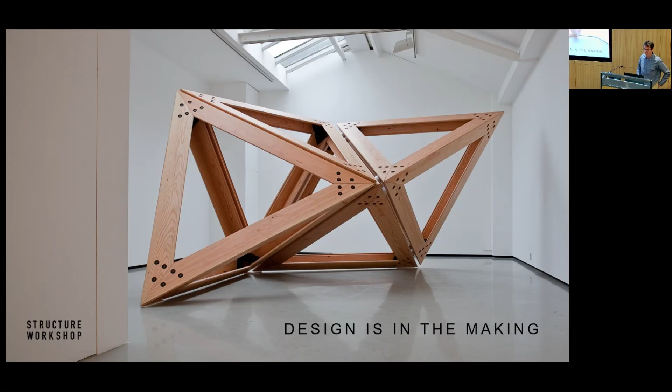Starting with a little bit of context, if you don't know my background, the first project I ever worked on after graduation was Crossrail, now known as the Elizabeth Line. I was conducting settlement studies above the running tunnels down Oxford Street, and that opened 30 years later. It gives you some understanding of how amazing that project is, the amount of combined effort, the amount of people that must have been involved, and how long a project of that sophistication takes, the gestation period. It's an incredible project, and it won the Stirling Prize last year.

However, whilst tunnel design was fascinating and I really enjoyed it, it's difficult to imagine a discipline perhaps with less potential for self-expression.

So after qualifying, I took some time out to work in a small bronze foundry in West London. Still noisy and dirty, but much smaller scale and much less regulated. And I really enjoyed that too - the satisfaction and interaction of physical work, as well as the cultural side of casting art.

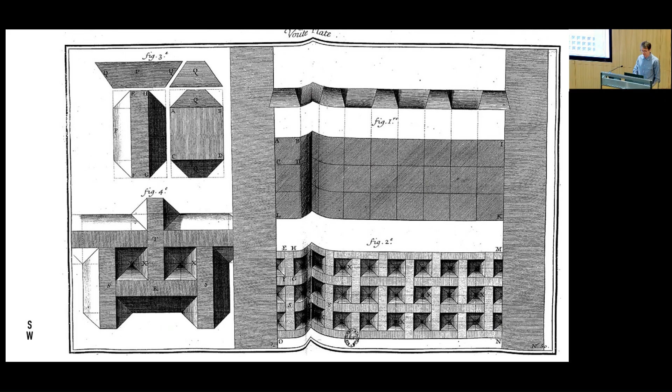Over the past couple of months, I've been working on a project with Jamie Fobert and his team, a proposal, during which they tabled this drawing by the French hydraulic engineer Joseph Abeille, describing his patent for a voûte plate, or a flat vault. This was drawn in 1699, from an age where etching and reproduction were costly, so it's concise and considered. It's both technical and full of imagination, beguiling even.

A great excuse to make a model, and a great excuse to spend Saturday with an old friend in his workshop in South London, talking about some fella from the 17th century and manifesting his idea into the physical. So together we milled up an old tabletop, made a jig, and cut a series of polyhedral modules.

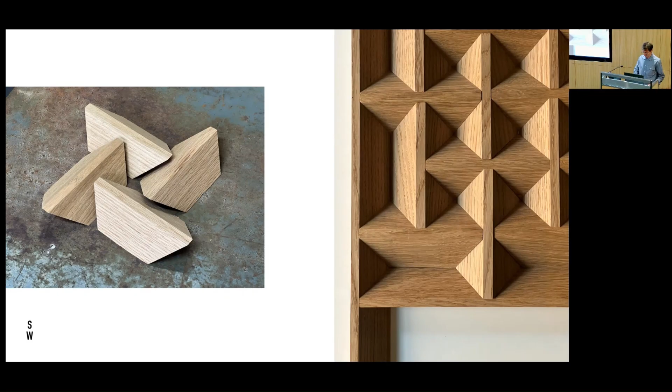And immediately our understanding improves. We gain a better appreciation of the parts, the way in which they tessellate, and their combined ability to connect without fasteners or glue. It also looked just like the drawing, which was encouraging. And it works, it spans. But what's interesting is that in making the model, it reveals characteristics that aren't immediately discernible from the drawing - the modules are really sensitive to rotating out of plane, and consequently the system is prone to collapse.

Perhaps it would be improved with a shoulder that locks each piece in place, but that would make it harder to make. And how would you make a jig to do that? Would a mason be able to do that? The design process is enlivened by making the model.

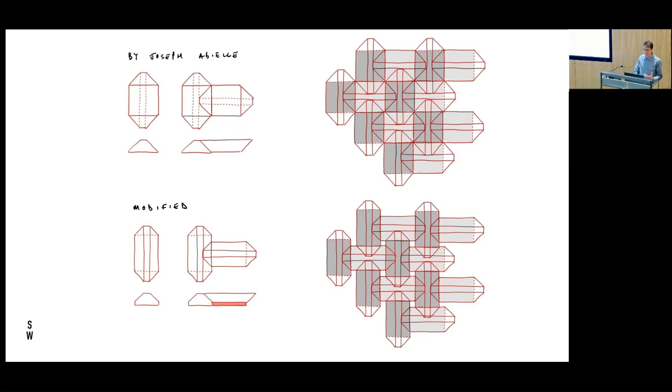Reciprocity is something we'd already been looking at with Carmody Groark Architects. This is the recently completed Art Play Pavilion at Dulwich Picture Gallery. This reciprocal arrangement of beams is similar. Each beam supports two beams at mid-span and is supported by two others at each end, and together the beams form a sort of two-way spanning mesh. But here the supports are simple. They actively allow rotation, unlike Abeille's voûte plate, which relies on horizontal restraint.

Carmody Groark wanted to use a UK-grown solid timber, Douglas fir, and the advantage of the reciprocal frame is that it only requires short lengths, which we felt provided more opportunity to secure high-quality, defect-free timber.

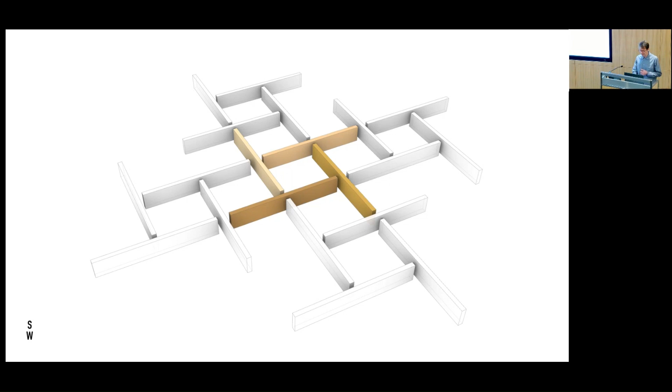Should assemblies start from the corner or from the centre? Turns out it doesn't really matter. How significant was cumulative slip in the connections? Pretty significant. And how might tolerances impact on the overall geometry around the perimeter? It's hard to say, actually.

But of course, engineering is more about materials than mathematics, particularly when designing in a natural material like timber. We wanted to check that our expectations of the timber could be met.

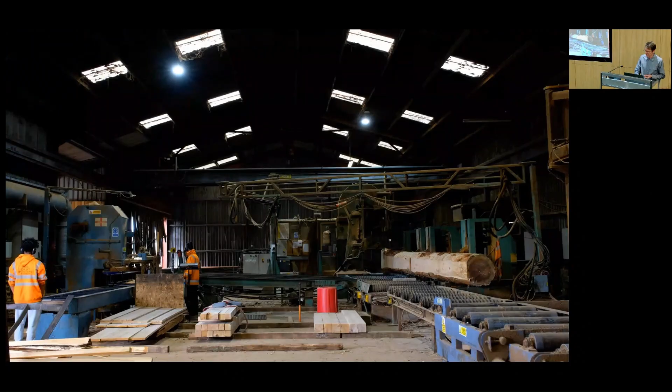So we turned to the expertise of a timber yard in Wiltshire called East Brothers. The subsequent discussions ensured that the pragmatic sourcing, cutting, drying, milling, and grading of the timber was rolled into the design, ultimately resulting in a high-quality supply that met expectations.

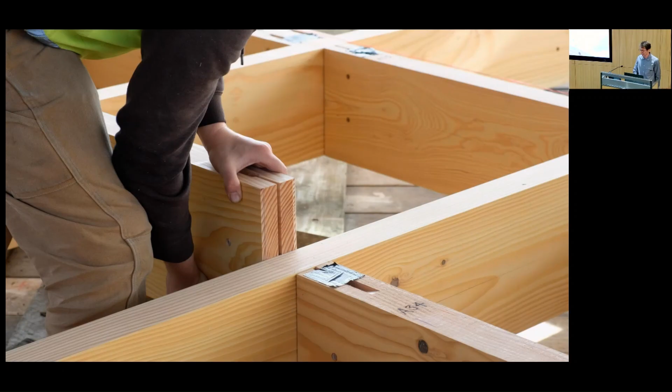And that process continued subsequently with the framer Timber Workshop, who added their practical knowledge to the mix, feeding into the design process, how to control moisture content during fabrication and installation, the practicality of our connection detail and how this might be improved, and allowed us to communicate our thoughts on sequence and tolerance. And the result is an exceptionally crafted building built from high-quality local material.

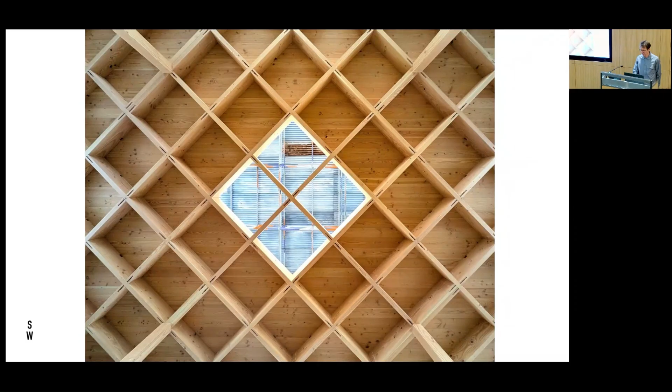Whilst we have complete control over our drawings, our influence over materials and workmanship is more limited, and that's why proximity to making matters. So I'm going to show a series of projects that I've worked on, all where craft and material exploration have informed the process, and hopefully demonstrate how this approach leads to solutions that are both technically resolved and rich in character.

The first is the Fenland Black Oak table, the closest we're going to get to a bridge this evening. The table is made from bog oak, the nation's rarest and most precious native hardwood. It's the magnum opus of master craftsman Hamish Lowe. For the past 30 years, Hamish has befriended the Fenland farmers, and now and then, when a farmer hits a piece of bog oak with the plough, rather than drag it to the side and burn it, they call Hamish.

So this story begins 5,000 years ago, when an ancient forest of massive oak trees once stood deep within the Fenland Basin of East Anglia, much, much taller than the oaks we have today. Over time, and due to a rise in sea levels following the last ice age, these spectacular trees fell into the silt of the flooded forest floor, and there they have laid, preserved in the peat in anaerobic conditions for 5 millennia.

In 2012, on a farm in the Wissington Fens of southwest Norfolk, a 13.5-metre section of one of the greatest of these buried giants was unearthed, from a tree so tall that the taper was indiscernible. Thankfully, the unique nature of the timber was recognised and the tree was retained whole.

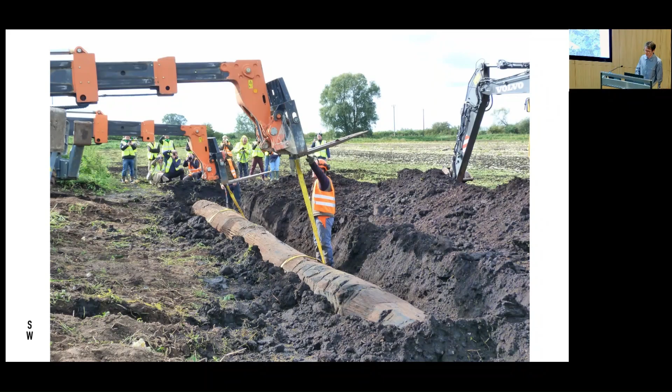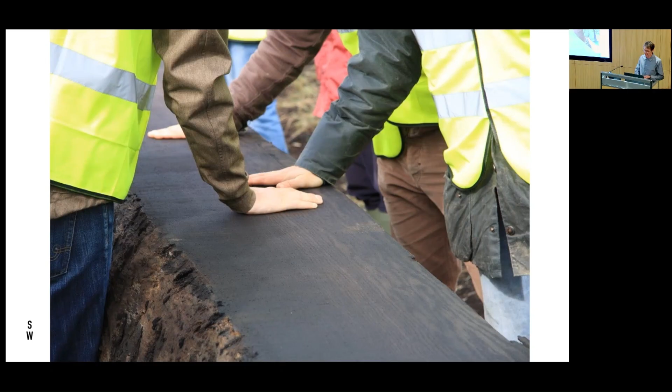Planked in situ, the quality of the timber was revealed for the first time, and it's completely mind-blowing. Perfect timber from the Bronze Age, carbon dated to 3300 BC. That's 1,000 years before the bluestones of Stonehenge. 10 magnificent, breathtakingly beautiful consecutive planks, unlike anything seen before.

Black oak needs to be dried artificially and very slowly. So over a period of 9 months, 1,800 litres of water were extracted from the planks in a purpose-built dehumidifying kiln. The planks shrank to almost half their thickness and a quarter of their width, and even 150 millimetres in length.

And I like this picture. It says something about the shared endeavour. And our protagonist, Hamish, is in the orange.

The planks were retained full length, and many new techniques were developed at the Building Crafts College to work on their unprecedented size. Here, the unique river joint is being set out, carefully cutting and matching the full length planks to one another to ensure it maximised the use of the existing timber.

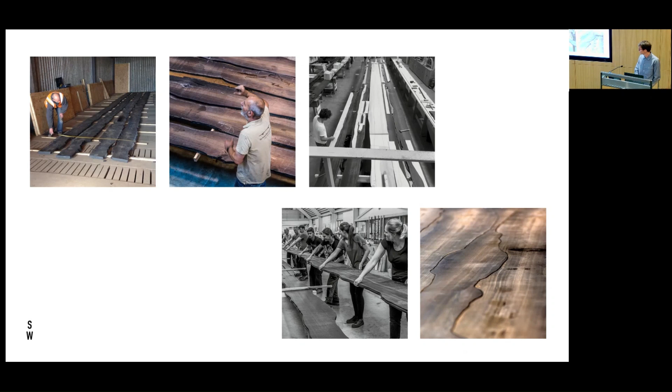The craftsmanship was exceptional. It was a simple decision to select bronze as the material for the base, and we developed a series of concept designs for analysis. The table obviously needs to be strong and stable, but if it was too stiff, it wouldn't conform to the uneven floors that we predicted for it.

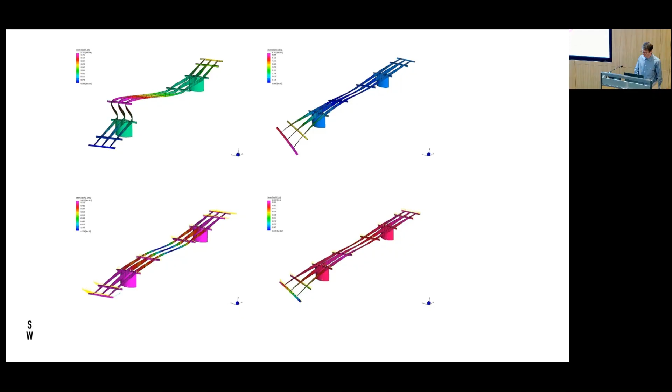Not stiff enough, and the cantilevering ends would bounce or rotate, making it unsuitable for a drink or a plate of food. It had to be just right, because there's no putting a beer mat under this table, I can tell you.

It also had to allow the timber to expand and contract according to its moisture content, and the table is huge and weighs more than a ton, but it needed to be moved by hand, and it needed to be split in two to allow for transportation. Plus, it had to avoid damaging a cathedral floor.

Ely Cathedral had agreed to display the table for 18 months, but we had strict limits on the point loads. And finally, it needed drop leaves. We'd been asked to design a mechanism that allowed 3 people to collapse the sides.

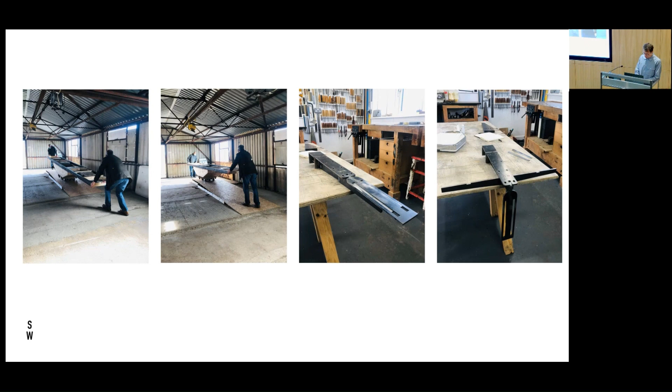So cue prototypes and exercise, rolling bits up ramps and developing leaf mechanisms. Ultimately, we selected a vertebrae type design, foldable ribs cantilevering from a torsionally stiff spine. This photo is at Benson Sedgwick's in Dagenham.

We could predict the behaviour of the bronze very accurately, but there's no substitute for having a bounce. You can see Joe testing the cantilever on the left from Structural Workshop.

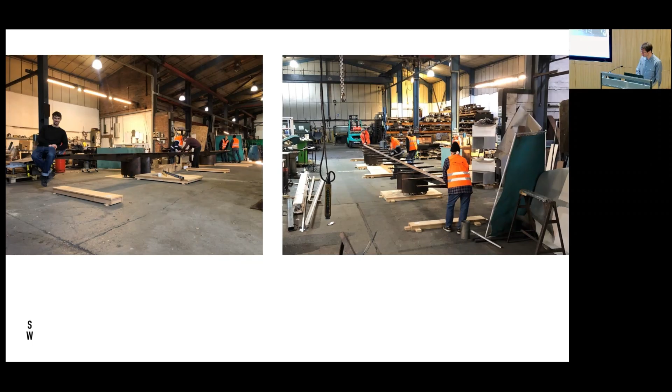This provides a sense of the scale of the table and how easy it is to move. And of course, those long drop leaves.

The table is currently at Lichfield on a slow tour around the cathedrals of England, and it's the most astonishing piece of timber that you can imagine, something I think is of international significance. But it also carries a stark reminder, not only of the depleted scale of our native trees, but of the real threat that climate change presents.

The flooding of the low-lying forests led to the total loss of something that was probably thought to be indestructible by the people of the time.

So from cabinet making to carpentry, sticking with timber though. This is Homerton College Dining Hall in Cambridge, designed with Feilden Fowles, who were appointed as architects following an international design competition. Alongside kitchen, servery and buttery, the project called for an emblematic centrepiece, an architectural composition to reflect the ambitions of the college and to relate to the rich and diverse mix of buildings around it.

The unlikely roots of the design, however, lie in a series of modest temporary structures on a brownfield site in Waterloo, the first of which was Feilden Fowles' own studio. It's probably as straightforward a structure as you can imagine, a post and beam frame that a first-year university student could design. But despite that simplicity, it demonstrates many of the characteristics of structural design that I'm interested in.

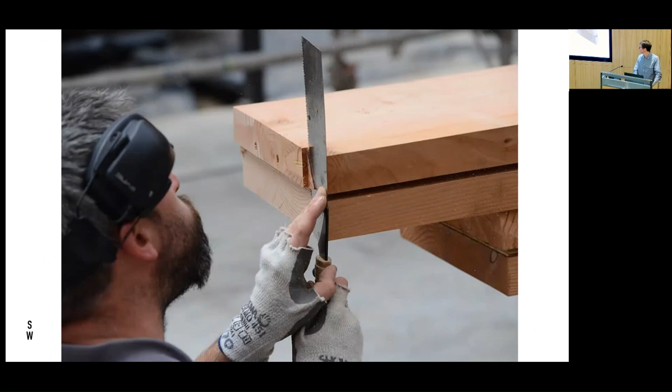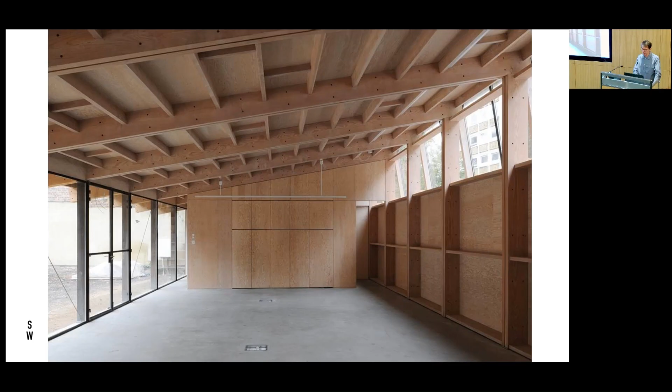A legible structure, very lean and simple here, expressed material used with skill, and a set of carefully considered details or connections. And then ideally, these aspects combine to articulate something about the ideas behind the building.

And for me here, it's simply the size of a piece of plywood. The lateral stability of the structure relies on a roof diaphragm to transmit wind loads to shear walls at each end. As such, the continuity of the plywood sheathing is necessary.

The door sets that you can see on the left are 1.8 metres wide, which provides the grid for glazing and primary beams. But anyone that has made something from plywood will know that it comes in sheets that are 2.4 metres long. So cutting these down to suit the beam spacing would waste 25% of the plywood.

So by ripping the sheets in half to suit the purlin spacing and by staggering the sheets, an effective diaphragm is formed that results in no waste.

The only thing you need are a set of noggins where the sheets are butt and where they must miss a beam. The depth of the beams, purlins and noggins halve sequentially, and the noggins march across the roof in thirds. It's an asymmetric arrangement based on an efficiency of material.

It's evident, but only if you care to observe it. But even if you don't, I think it subtly contributes to the liveliness of the building.

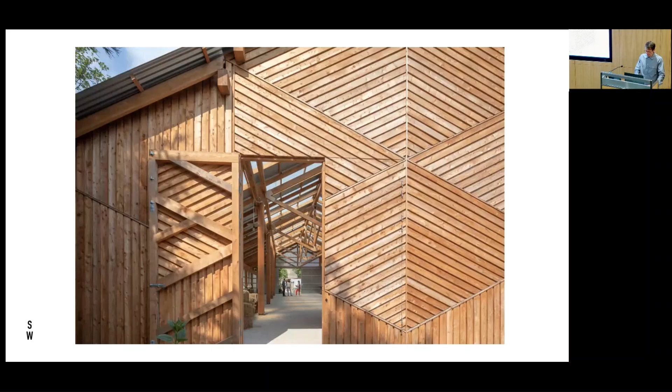The next building is a barn that bookends the same site. This is one of my favourite projects of all the structure workshop projects, despite its simplicity. Again, the structure is expressed and legible.

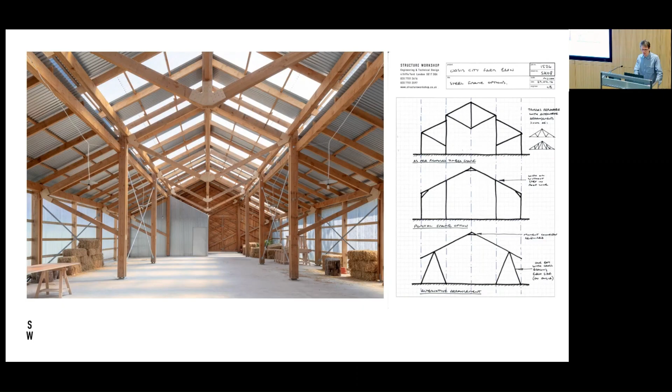Here, it's a little bit more playful. Distorting the central tied truss into a diamond has provided the building with some identity. And again, the articulation of the connections contributes to the quality of the building.

The design is intended to make the structure as simple to build as possible, and the connections use plywood gusset plates, carefully set out, enabling them to be CNC cut on a router. The framing members then have single straight cuts each end and are simply zipped together with screws. And with no steel flitch plates, the frame is extremely low in embodied carbon.

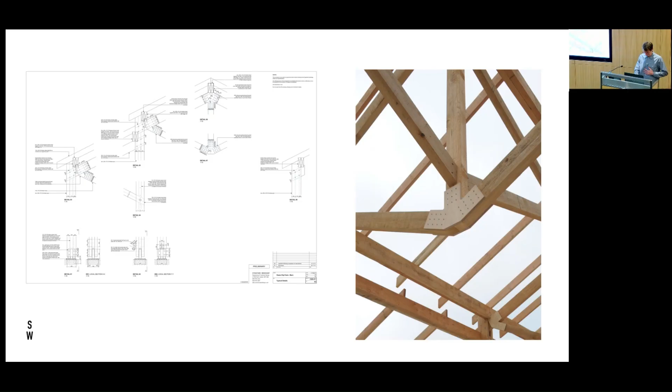The carpenters said they loved it. Well, that's what they told me anyway.

So when we came to design the dining hall project, it was the continuation of that existing relationship with the architect, discussing, deliberating, sketching and calculating together, creating designs for many built and unbuilt works, alongside a shared language of designing in timber and a mutual interest in low-tech, highly crafted forms of construction.

Steeped in the arts and crafts, the rich detail and material quality of the building acted as a signpost for the project, a reminder of the potential the materials and workmanship have to provide that legacy.

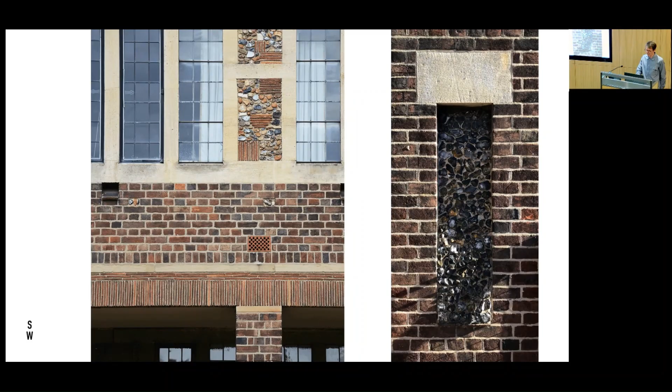Though unconventional, the butterfly truss is stable as a 3-pinned arch, but we found that it was difficult to develop enough stiffness in the long, slender columns to resist spread or sway.

Our solution lay in harnessing the buttressing effect of the walls. By providing restraint at the bottom of the lower rafters, they act in compression only, creating a stiff point right at the centre onto which the roof can span. This principle is similar to traditional Cambridge halls and chapels that use buttresses to counter the thrust of their vaulted ceilings.

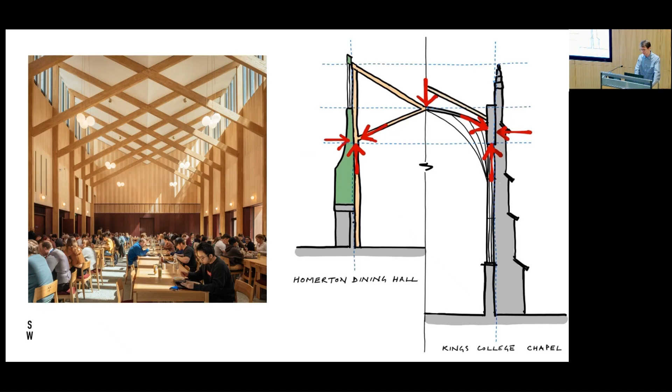This time, coppiced sweet chestnut was selected as the timber. Coppicing retains the root after harvesting, making it unusually sustainable, even for timber. And by cutting out the knots and defects and laminating the laths into deep sections, long and highly engineered members are possible.

Unfortunately, though, for us, not quite long enough, and the timber was not available in the lengths that we wanted that could span the 15-metre wide hall.

A stable 4-way connection was required right at the centre. It was this connection which was informed by how things are made, and which we explored in the office with a series of mock-ups that ultimately resolved the truss: a bridle joint with interlocking tenons.

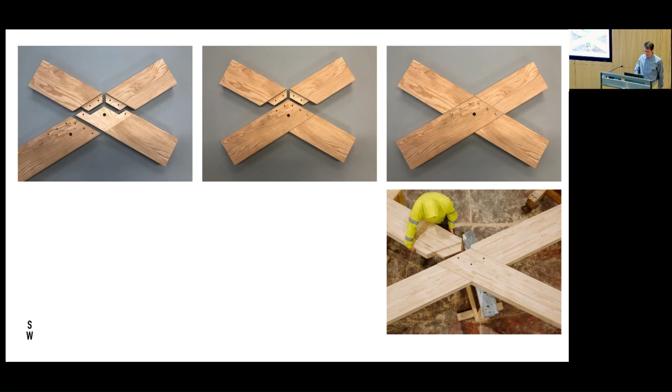The final 1:5 model was later exhibited at the summer exhibition at the RA, which I think illustrates the appeal of combining engineering with craft.

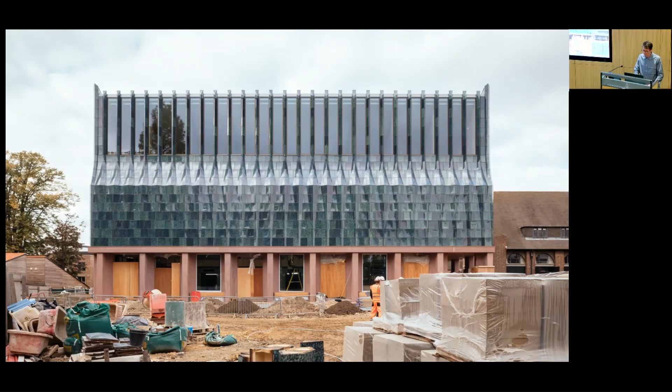Our approach to celebrate materials and craftsmanship extends through the project. Seen from the south, the ceramic facade rests on a pigmented concrete plinth.

This is faience, a tin-glazed ceramic familiar to pubs, tube stations and Victorian museums, made by Darwen Terracotta in Blackburn. The load-bearing pots are made in traditional plaster piece moulds out of refined European ball clay, and together with the architects, we explored the geometry and the bond to accommodate shrinkage in production and movement in use. When combined with the diversity found in the glaze, the result is a facade rich in detail and variation, despite its bulk.

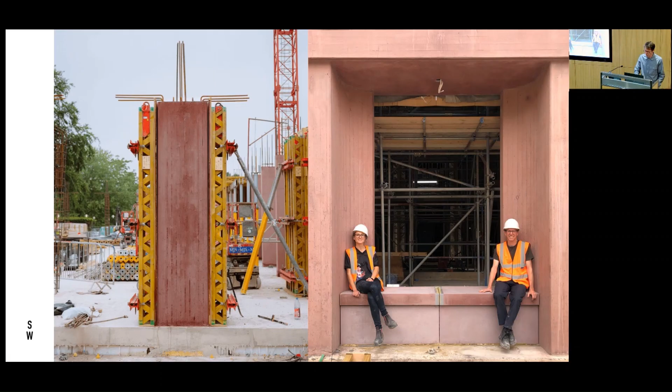Full-scale mock-ups were produced to ratify the approach. A similar attitude, marrying process with design, was taken to the boardmark concrete. Again, the colour, the diversity, and the impression of the timber grain serve to temper the concrete, a material that can easily be harsh or blank by comparison. And here was Sophie Frith from Structural Workshop, who played an instrumental role in the project right from the start and right to the finish.

It's a testament to the creative process that Feilden Fowles curate, that a building of this scale can express craft and making so completely. I think it stands as an example of what can be achieved when the character of materials is expressed and leveraged through design — an arts and crafts building for the 21st century.

My talk's not focused on embodied carbon, but in the midst of a climate crisis, carbon has to be seen as an arbiter of what is and what is not good design. Considering the inefficiencies of the hall, it's got 3 stories and 1 floor. The quality of the materials used and the ambitions for the design life, it performs pretty well, achieving an iStructE sustainability rating of B without the faience. But this drops to E with the faience. So how should design quality and design life impact our thinking in terms of carbon? And should we be talking about value for carbon instead of simply kilograms of CO2 per metre squared?

The clear imperative is that we should be taking a retrofit-first approach to construction, building only when necessary. Often this is deemed to be unpractical, and I think we're predisposed to see buildings as finished articles rather than buildings that can change and learn as the world changes around them.

The most compelling case I have for this is a set of dilapidated buildings in Hackney, which were bought by the product design company Pearson Lloyd to act as their new headquarters. Frustrated by the cost and waste associated with designing a new building, the clients, Tom Lloyd and Luke Pearson, asked to meet me on site to have a look. It was this meeting and the conversations that followed that led to the buildings being retained.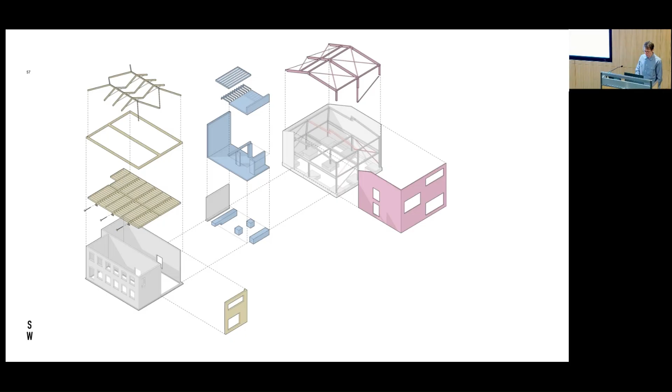The workshops included two bays of traditional 19th century construction on the left-hand side, brick and timber, and two bays of late 1980s construction on the right-hand side, steel frames, with very poor quality infill in between. Critically, foundations were retained, and second-hand stocks and timber were used to restore the Victorian parts. The steel frame was raised and back-analysed to ensure high levels of utilisation and reclad. The completed building is recognisable but transformational.

The secret ingredient here was the lead designer, Cassian Castle, who acted as both architect and builder. This, in combination with an engaged client, allowed opportunities the building presented during construction to inform the design as the project progressed.

The result is a building rich in character and rich in history, that celebrates retention over replacement, and which has one third of the embodied carbon of an equivalent new build. It's better than a new build, and it was facilitated by early open conversations about expectations and a willingness to be led by construction rather than to dictate design.

This adaptation of buildings has happened since time immemorial, and has only become less common as construction has become easier with the advent of corporatized materials and machines that run on diesel. In 2017, we added a pavilion and link building to the Fratry building at Carlisle Cathedral.

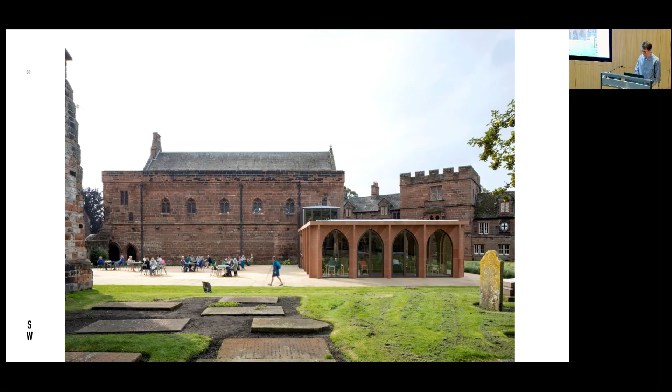Despite being Grade 1 listed, the building has been constantly altered and chopped around. The east wall of the Fratry is 13th century and the crypt is thought to be 14th century. Much of the building was rebuilt in the 15th century and again restored in the 17th century. It's been used as a monk's refectory, a brew house and a barn, a school and a library.

In the early 19th century, it was converted into a chapter house by Smirke, and a new door was added to the north wall. Then in the late 19th century, it was changed back into a hall by Street, and the door was reversed and tucked under a new porch. This photograph shows the Smirke door with its inside outside, and the porch removed.

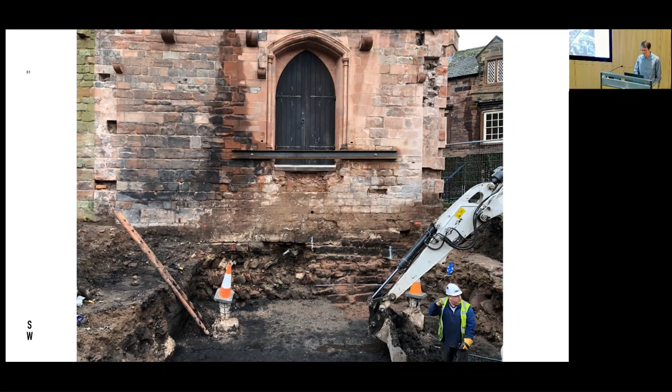It was taken just after an archaeological excavation for the new link designed to connect the crypt to ground level, and the ground level to the Fratry level. The proposal was to reverse the Smirke door and create a new door into the crypt.

But excavation revealed a series of horrors, including a Roman drain under the door still running with water, and evidence of stone underpinning on the right-hand side, the corner of which had visibly dropped. It was this arrangement that we had to contend with.

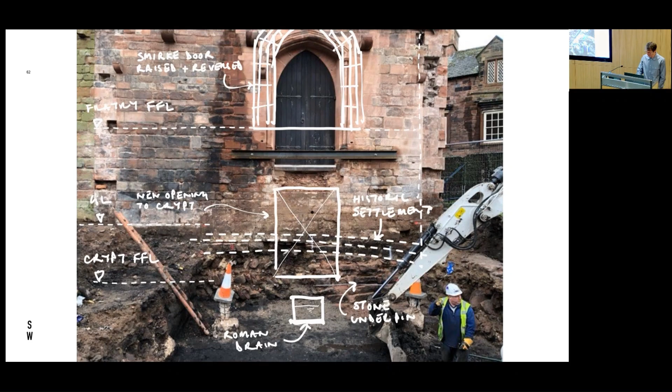That's the background anyway. The process of reversing the door was a slow and careful exercise in stabilisation, the design of temporary works to support the medieval wall, followed by the sequential dismantling of the Smirke door, all the while labelling the stones to enable reassembly.

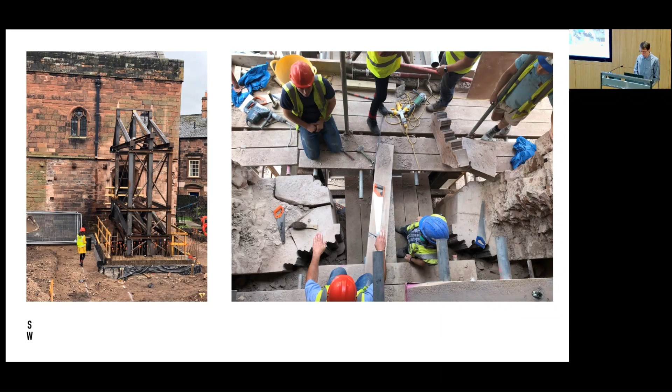These works to the door were very much led by the stonemasons, Askins and Little, and as the door was dropped, it revealed the graphic cross-sections of the mouldings alongside original masons' marks. And if there was ever a photo that said design is in the making, this might be it.

This is the restored Fratry with the Smirke door reinstated level with the floor at the back on the right, making the hall fully accessible for the first time in 600 years.

And the door itself, with the outside inside and the inside back outside in its rightful position. The evidence of successive alterations is clear to see around the original door, in the new stone under the relieving arch, which is where we propped, and in the making good of the reveals on each side.

And whilst the ornament on the outside is beautiful, the evidence of repair on the inside, I think, is also equally beautiful.

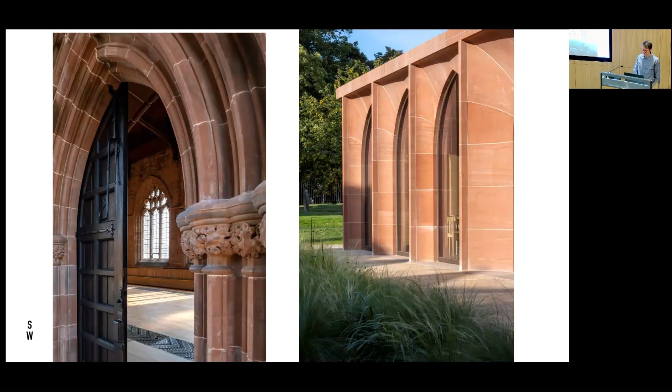Working alongside such skilled craftspeople was inspiring, and it was interesting to see how the relationship between the design team and the masons permitted their deep practical knowledge to inform details of the new stone arches of the pavilion. This was originally conceived as a machine-cut profile, but ultimately cut by hand.

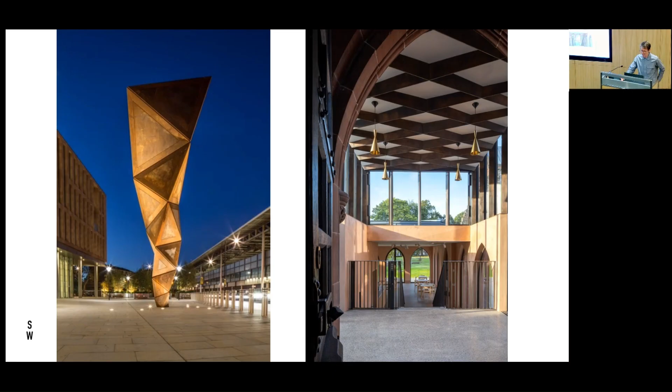And that relationship between old and new and the sharing of lessons between dissimilar objects is one that is rich in potential and again rooted in making.

On the left-hand side is Paradigm, a large-scale sculpture that we had designed previously for the artist Conrad Shawcross outside the Francis Crick Institute at St Pancras. And on the right-hand side is a photograph looking out through the Smirke door showing the bronze diagrid roof over the Link building.

The structural approach to 3D modelling, profile cutting and fabrication are essentially the same, one project informing the other. Similarly, our work in building structures has the potential to inform our work in the arts.

Of course, handmade bricks are brittle and variable, and individually they are unreliable, yet together in lime mortar they combine to have this enormous plastic structural potential. Our codes allow for this variation via the concepts of characteristic strength and material factors, ensuring that our masonry remains in a redundant state. But what about other materials where the hand of the maker and variation looms large?

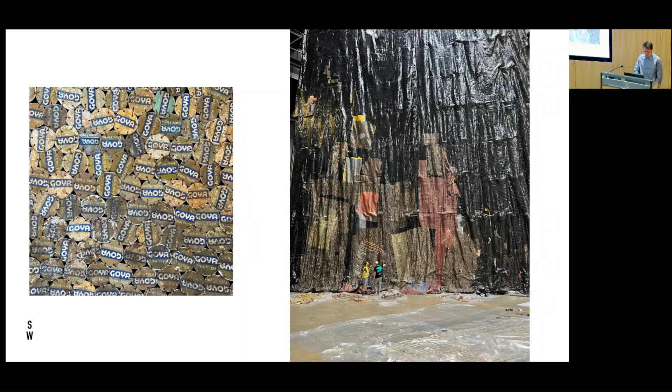Another long-term collaborator is the London artist Conrad Shawcross. Conrad and I first started working together in 2006 on Space Trumpet, and we've not stopped working together since. Conrad at that time had been commissioned by Unilever to deliver a kinetic work for the atrium of their building on Blackfriars Bridge in London. It was a significant project for me, being the first permanent artwork I'd worked on that was overtly structural.

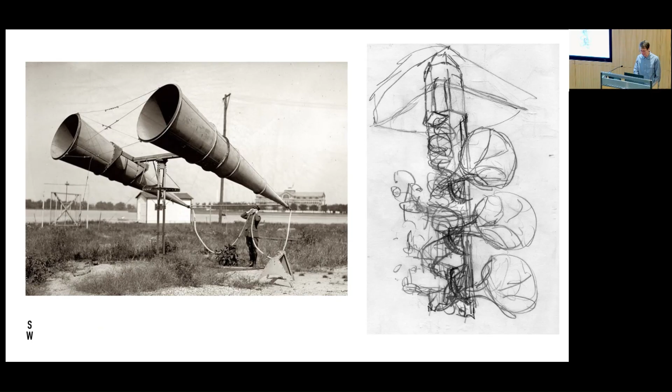His work at the time was predominantly in timber, and I look for structural inspiration in precedents. For example, the structure of the arms, which were to support large trumpets, were inspired by the structure of biplane wings. These are essentially a torsion box designed to stop the wings rolling off the back of the fuselage.

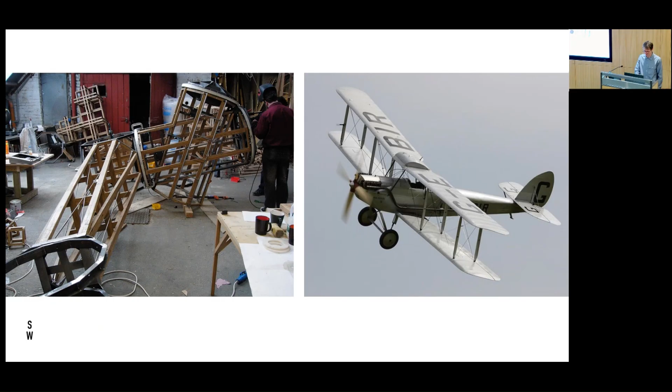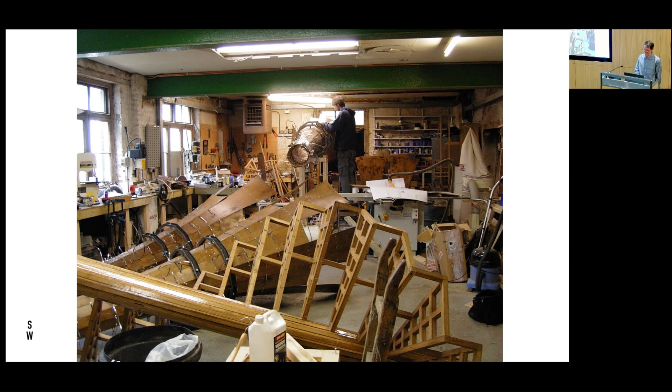Conrad builds all of his works himself, and the problem at that time was that his workshop was fairly rudimentary with little quality control. How then to reconcile the need to assure robustness in the structure hanging overhead with the artist's approach to fabrication?

I often think that at the heart of structural engineering is the need to gain sufficient confidence to take responsibility. It doesn't really matter how that confidence is gained, but it must be there. Intuition, precedent, calculation, load testing, all are valid approaches. Typically, the design intent is then enforced through a specification, but that approach was not going to work here.

My solution was to duplicate all the primary load paths, each part carefully designed, but if one part of the built structure were to fail for any reason, a second load path was there to carry the load. The structural design was defined in a set of 2D drawings, including the patterns for the trumpets, all connection details and the bearing design.

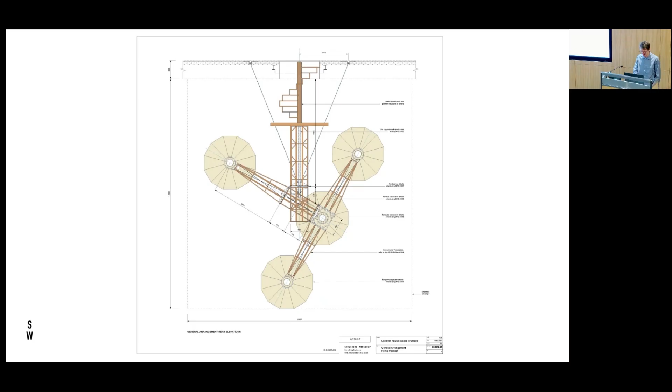It hangs from the flying carpets designed by KPF and Arup, and amazingly, when we switched it on, it worked, turning on two axes. And it still repositions at midday every day, almost 20 years later.

Looking back at those drawings is interesting, and as I said, they included all the connection details, even the bearing design. Drawing, I think, is the bridge between design and making, and to me has a firm foot in both camps. By sketching, a design is brought into being, and in drawing, the system of construction is resolved.

As designers, we'd ideally do both, but whilst I still sketch all the time, I rarely do a drawing these days, and that distances one from the real detail.

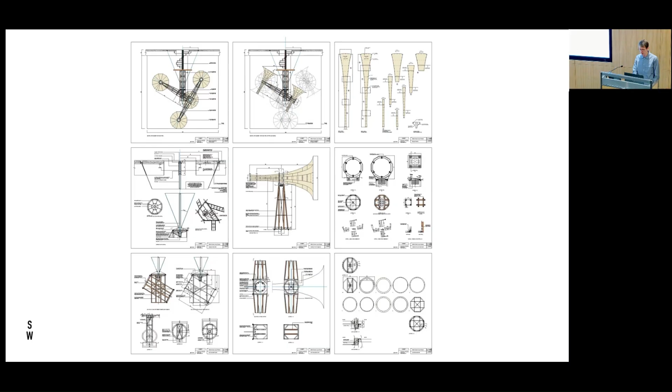Since we completed Space Trumpet, our combined experience has grown, but at the same time, design tools and fabrication methods have also radically advanced. This is another kinetic work from a few years later called Nervous System Inverted. Also designed in 2D, but by this stage, Conrad's workshop was better able to meet demands of the structural specification. And where uncertainty remained, in the welds, for example, targeted testing could be carried out.

The sculpture is a working rope machine concerned with planetary motion. You can see the machine supported at the top of this tower and the rope piled up next to it on a winch in the floor. We designed the tower specifically for the installation in the Mudam Gallery in Luxembourg. Again, looking for precedents, the structure was inspired by the structure of a gasometer.

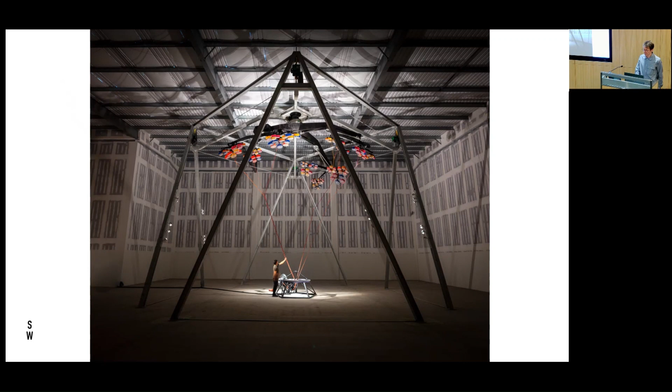Conrad's most recent kinetic work is another rope machine called Umbilical, commissioned by David Walsh of the Museum of Old and New Art in Tasmania. Temporarily tested and exhibited recently at Here East, it's currently been dismantled before being shipped south to form part of the museum's permanent collection. And it's a project that has been more than 10 years in the making.

Coincidentally, its kinematic envelope is exactly the same as Space Trumpet, but the approach to design and fabrication is a complete world away. Certainly its ambition and complexity is not something we could have resolved then, and even now it presented us all with significant challenges to overcome.

The machine comprises 135 spools of cord on quaternary arms that circle tertiary arms, which circle secondary and primary arms, all powered by a single motor. Over the course of a year, it produces 300 meters of rope, equal to the length of the cord on each spool.

Each arm is asymmetric, and the diameters of the individual cords vary. The gear ratios between arms are such that the motion is aperiodic, and the machine will never repeat. As such, it produces an asymmetric rope that represents the state of the machine at the exact time it was made. And it's akin to the motion of the solar system.

Far from the moon orbiting the Earth and the Earth orbiting the sun in neat elliptical orbits, the solar system as a whole is hurtling through space in a wildly complex and aperiodic trajectory.

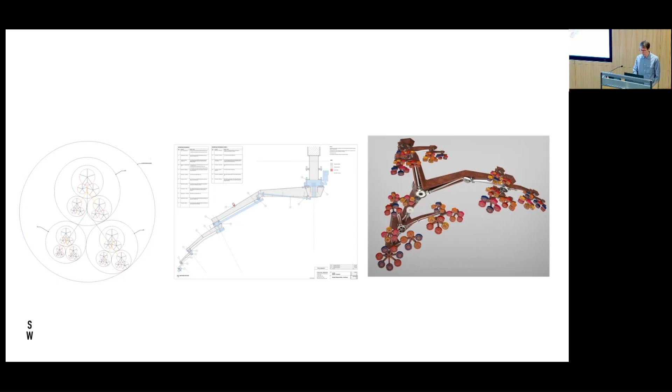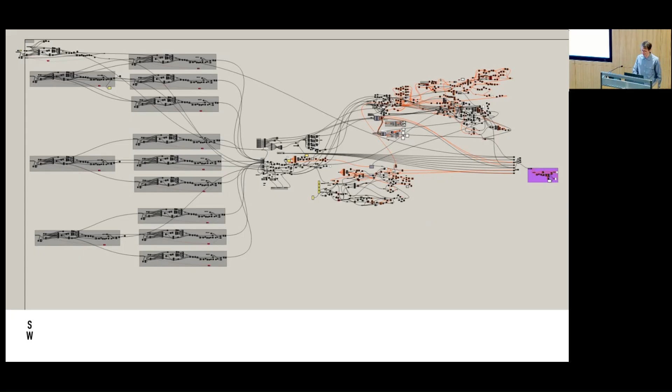While Space Trumpet has 9 2D drawings, Umbilical has a single coordinated 3D parametric model that all fabrication can be based on. This is an image of the grasshopper definition of that parametric model.

With so many components and mechanical forces and a machine that never repeats, it was a challenge to define the loads and the load paths and to establish a comprehensive set of possible load combinations and permutations. Add to that the complication of cyclical loads and fatigue and the changing balance of the machine as the spools empty, and you start to see the scale of the design task we were confronted with.

The fabrication and assembly was equally challenging, and it's a huge testament to Conrad's dedication to maintaining production in-house, that it was made in the same workshop as Space Trumpet, albeit transformed in terms of capability.

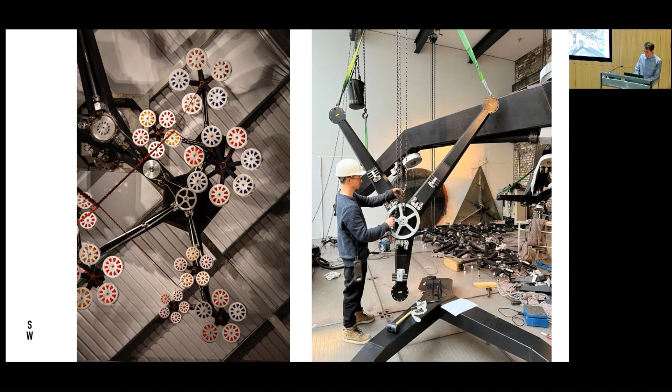Again, contrary to my inner fears, the machine worked perfectly, and it's worth pausing to enjoy that motion, which is asymmetric and aperiodic.

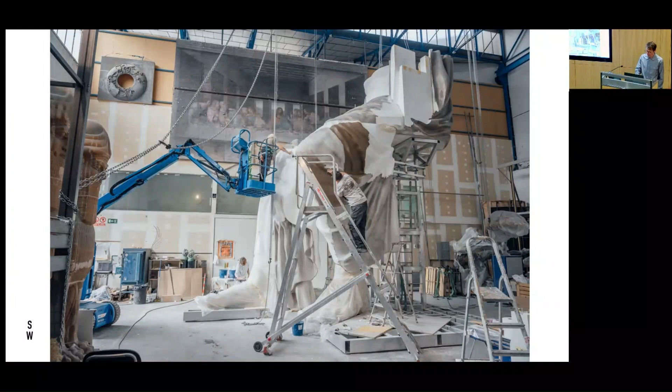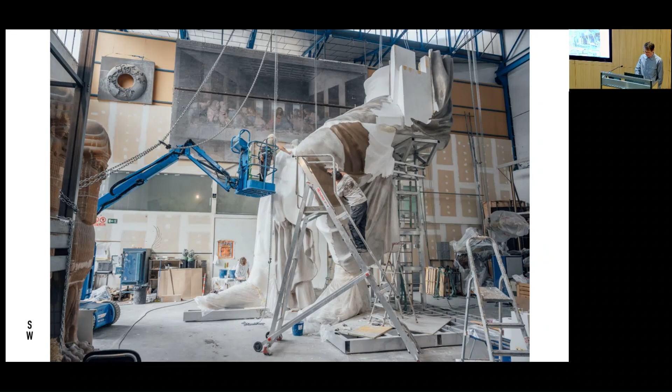Their workshops are based in Madrid, and it's an Aladdin's cave of artifacts. The work in the middle you can see is a recreation of a Roman sculpture, the Colossus of Constantine, which we provided the engineering for.

But it's also worth noting some of the other works covered in dust. The Lamassu, or winged lion, whose head you can see poking out from the left, from the British Museum. And Leonardo da Vinci's Last Supper, just casually hung on the wall above. All facsimiles, of course.

It was during lockdown that Adam called me to say that there was a competition to design and make a new dinosaur for the Natural History Museum, and that we absolutely must do it.

It became a project where the traditional boundaries of the designer and the maker were blurred, as our different areas of expertise collided, learning from each other and solving problems together.

This time the story begins in the late Jurassic period. And 150 million years later, in 1898, railway engineers in Wyoming uncover a gigantic thigh bone.

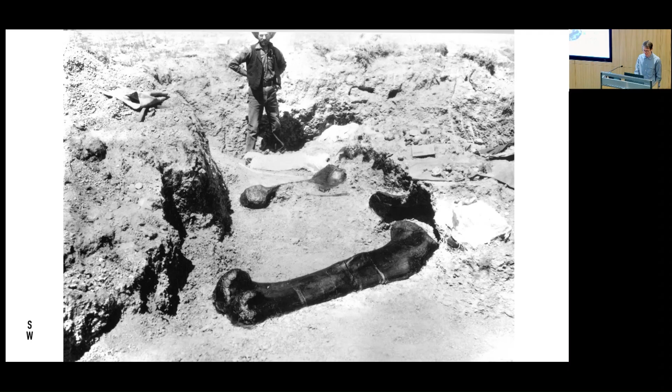Dinosaur mania ripped through America, and an industrialist funded the dig. When it was formally described, it was named in his honour, Diplodocus carnegii.

In an example of Anglo-American diplomacy, Carnegie gifted a plaster cast of the fossilised bones to King Edward VII, and it was this plaster facsimile that was displayed in the Natural History Museum for 120 years and became affectionately known as Dippy. And if you visited London as a kid, you would have seen Dippy in the entrance hall of the museum.

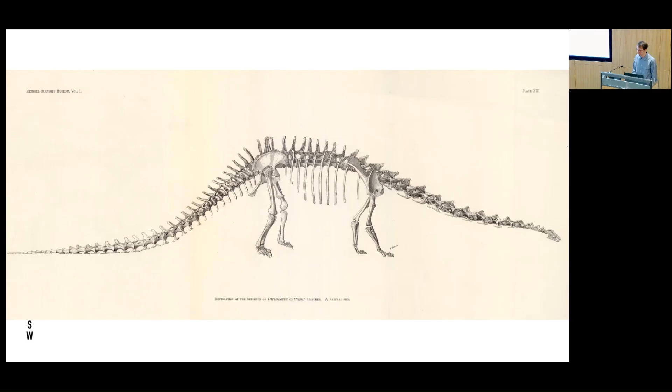So the brief was for a new life-size bronze dinosaur based on Dippy to be exhibited outside permanently with minimal visible structure. It was to be life-size, 25 metres long, and made up of 292 individual bones.

It's the length of 3 London buses, and the tail alone is 15 metres. That's a cantilever. Somewhat rashly, we said we could do it with no props at all. We entered the competition and we won.

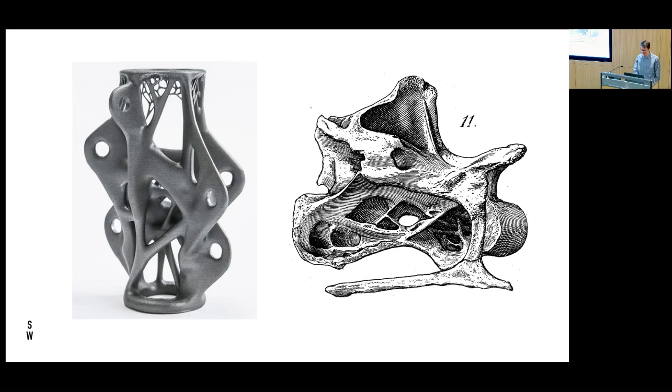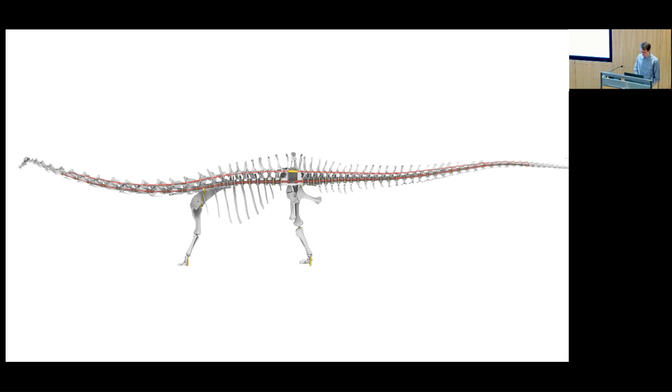The bones themselves form the main structural components, each vertebra being a separate hollow casting. The spinal column is post-tensioned with stainless steel tendons, inducing a large compressive force in the vertebrae, allowing it to cantilever out from the centre of gravity, which is magically located in the ilium, the giant hip bone, the natural predetermined point of balance. But how do you take a biological form and apply some engineering?

Here I need to pause to credit Structure Workshop engineer Max Clayton. Max and I have worked together for over 10 years, and we worked closely throughout this project, but it was Max who mastered the virtual tools required to manipulate the geometry and to interrogate the structure. And it was these tools which ultimately allowed us to ratify the design.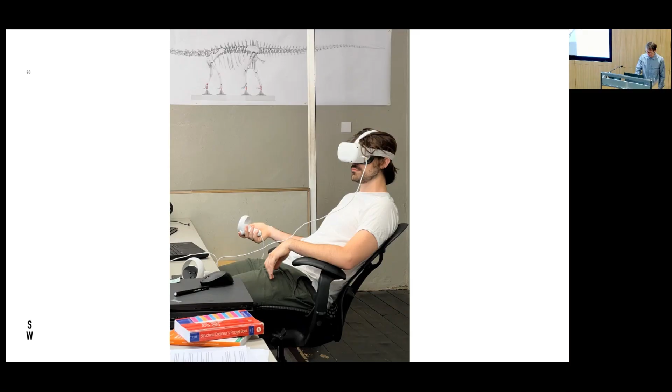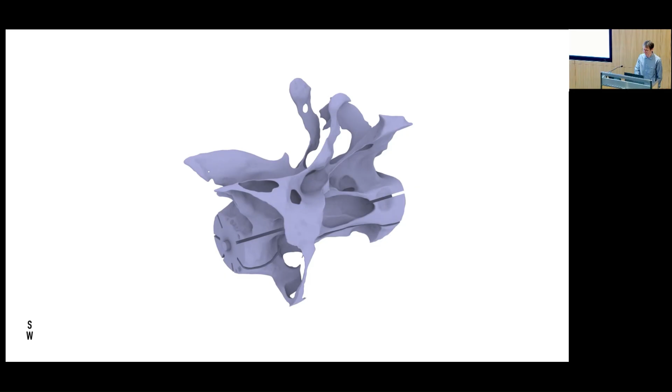We started from a scan of each bone and applied engineering features, flattening the joints to create perfectly elliptical bearing faces which matched the adjacent vertebrae. We then modelled a void inside and subtracted that from the solid to create a hollow form that would become the cast. This was then meshed, enabling it to be virtually loaded and analysed.

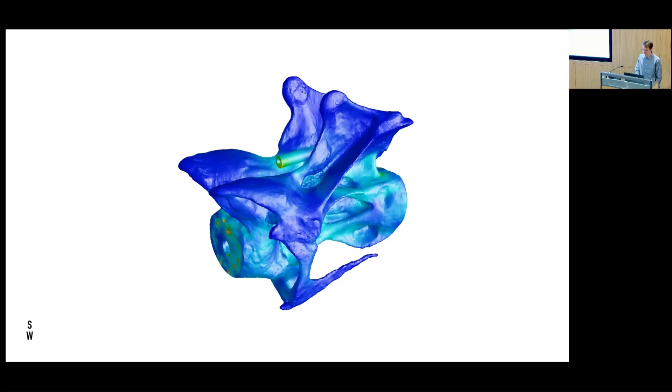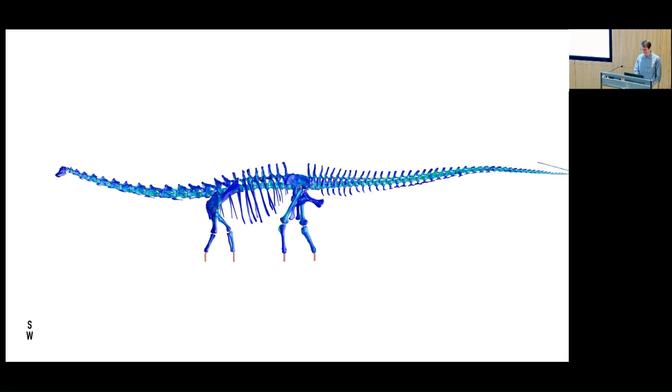That's just one bone, and we did this for the whole dinosaur, ending with a full FE model that we could manipulate and use to predict behaviour. This model takes 2 days to run on our computers. We probably should have got a better computer, actually. And for a while, we weren't even sure we could get it to converge and provide sensible results.

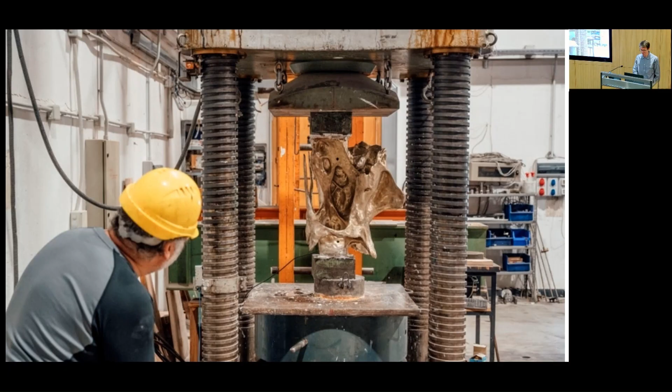When our early analysis predicted that vertebrae would collapse under the compressive load, our modified design was proven by a full-scale compression test in Madrid. Again, nature had provided the answer: internal diaphragms in the bones to resist buckling and develop additional strength.

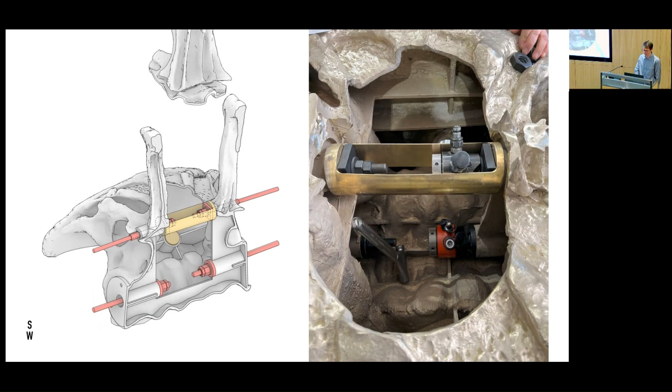Those tendons terminate inside the ilium, allowing the forces fore and aft to balance. It's a naturally located stressing chamber, providing access to apply the tension via hydraulic jacks and a space for the permanent bridge and locking nuts.

Our design and specification were ambitious and highly demanding. And Adam was keen to remind us that the physical world is far messier than the virtual world. Whilst he reminded us of that, the approach to fabrication was in fact exacting, combining advanced forms of digital mediation with ancient artisanal processes, executed by a team of highly skilled craftspeople and technicians.

Starting with the high-resolution scan data, we pass from the virtual world to the physical, 3D printing each bone. These are moulded in silicone, using plaster jackets forming an accurate negative of the bone. The mould is then used to create a positive in wax, which gives the process its name, lost wax casting. The lost wax method is truly ancient, and the oldest known examples of this technique are over 6,000 years old, not far from the age of the Fenland black oak table.

The wax is invested, or entombed, in ceramic and protected and supported by plaster, grog and scrim. The investments are then fired in a kiln or a muffle to remove the wax, leaving a perfect negative for the molten bronze to be poured into.

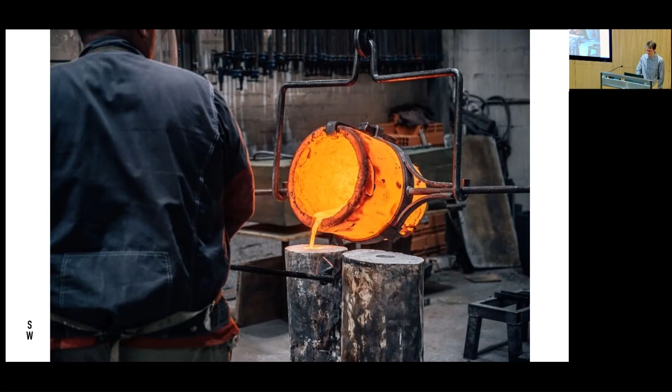The principle is simple, but the process takes a huge amount of skill to preserve the detail, to design the runners and risers which allow the bronze in and the air out, and to handle the large delicate moulds, and to pour in bronze at 1,000 degrees centigrade at just the right speed. Wax distorts and castings shrink, and if the bronze is too hot, the tin burns off, and impurities in the mould can affect the alloy and the quality of the casting. All of these factors and more must be allowed for and mitigated.

This process of transformation is the story of design and making. First, a living dinosaur. Death and collapse, bones buried in the silt, a negative impression in the sediment, slowly displaced by minerals to form the fossil, dug up millions of years later, to be moulded in the negative to form the plaster positive that became Dippy.

Then positive scanning, negative moulding, positive wax, negative investment, before finally becoming a positive bronze casting again. Inevitably, the process produced distortions that did not meet the requirements of the design, and a little like an engine block, each cast vertebra was rescanned and milled to achieve those perfectly accurate bearing faces.

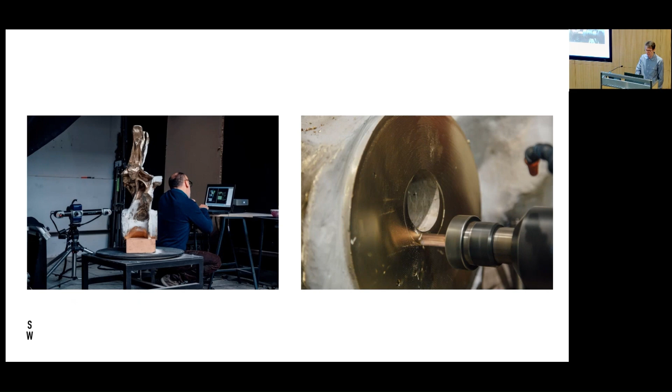Once cast, the bones could be trial assembled, before beginning a carefully determined sequence of threading bones onto tendons like beads on a string, and locking in the tension as the form developed. You can see here where the tendon runs along the top of the vertebrae.

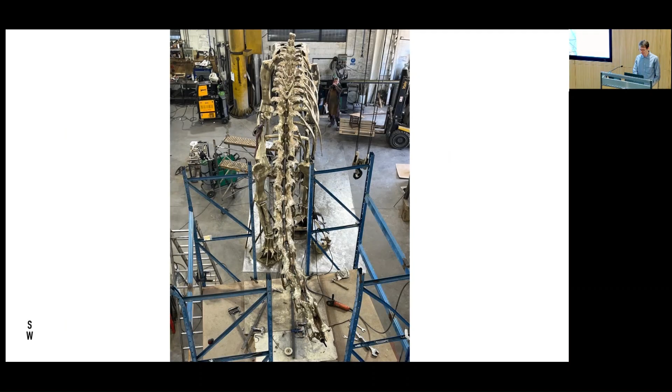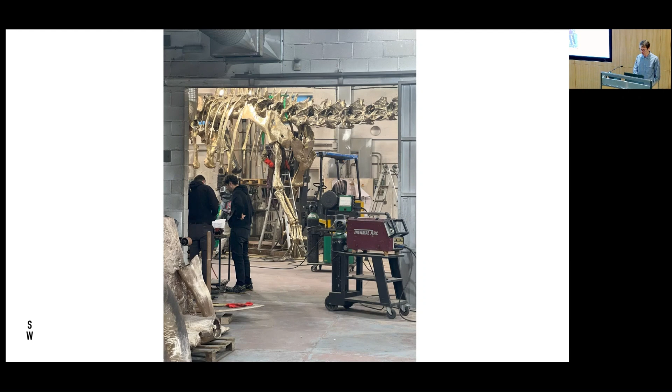It was an incredible experience to witness the skeleton slowly come together. There was a huge beast lurking in the workshop, and unsuspecting visitors would be stunned into silence as they came round the corner. In a final act of confidence collecting, the long cantilevers were load tested by hanging what we called the stag do load from both head and tail.

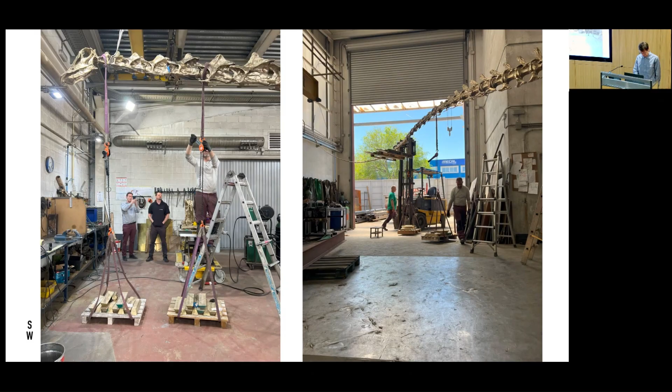260 kilograms on each, giving me and Adam a heart-stopping afternoon, but the final confirmation that we had designed something remarkable and that Factum had managed to make it.

It was delivered in 4 parts by road, requiring a subtle amputation to get under the bridges, and then installed over 2 nights. In the end, it was due to the combined effort of a host of talented and dedicated people working together, designers and makers who realised the significance of the project and the opportunity that it represented.

Without props, the true elegance of this mighty animal is for the first time expressed, demonstrating its beautiful detail and balance, the clarity of nature.

Last year, the Natural History Museum welcomed 5 million visitors, which gives you an idea of the potential that Fern and its counterintuitive design has to inspire future generations. Certainly, we need their creativity and their wonder to solve the existential problems that face us over the next 120 years and beyond.

I've shown you a series of projects where I think craft and material exploration have informed the process, but are there any lessons we can take forward, and are these ideas scalable?

Perhaps 3. Firstly, to value what we have, our existing buildings. To resist demolition and allow buildings to learn and adapt, and by being willing to invest in their past, their present and their future. This is the Fashion Museum Bath with 6A Architects. It's a project to turn a disparate group of existing buildings into a new cultural centre for the city, reusing the buildings that we can and reusing the foundations and materials where we can't.

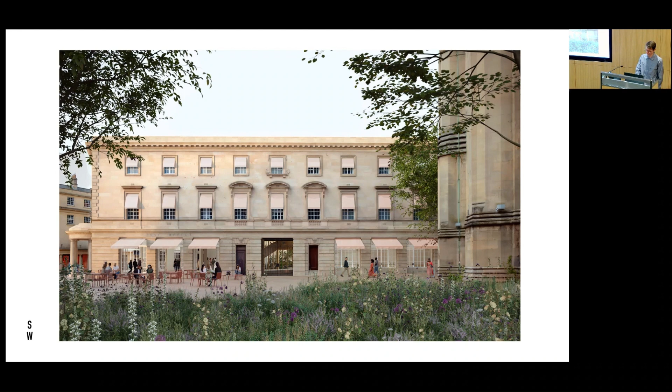Secondly, when we do build, it should be for future generations, not just our own. Simple, understandable buildings of high quality. Buildings that will engender affection, retention and future adaptation.

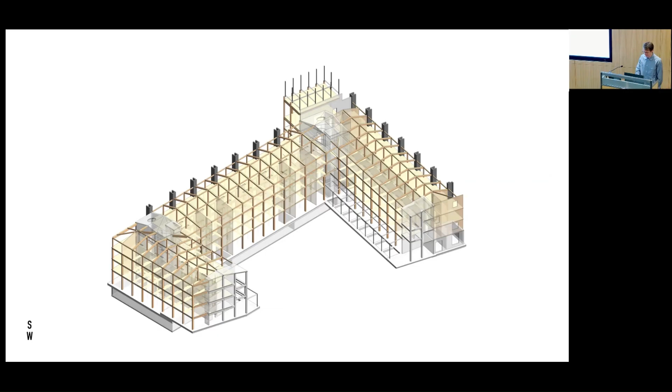This is the design for a new block of student accommodation for Mansfield College in Oxford, again with Feilden Fowles Architects. It takes forward the lessons of those Victorian warehouses, simple, legible, delaminated design, and a low-carbon engineered timber frame with a load-bearing stone facade that can be stripped back, maintained, and readily adapted in the future.

And finally, that making things together with our hands, whether that is gardening, knitting, baking, or building, is deeply human. It connects mind and body and encourages us better to understand and value the world around us. Thank you for listening.